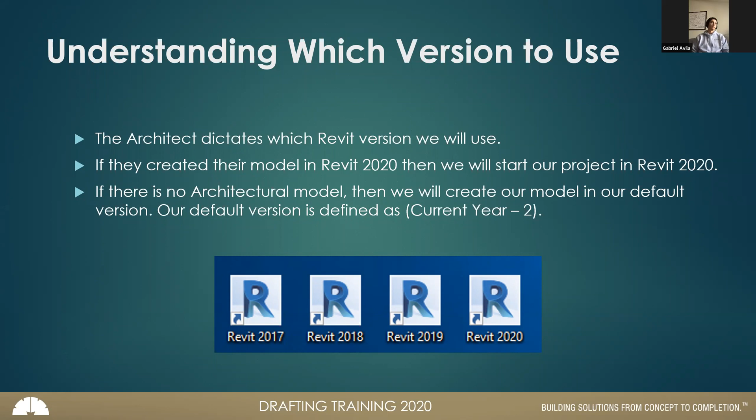All right, sounds good. Again, if you have any questions anytime, feel free to stop me or put it in the chat. I will be bouncing back and forth, so if I'm bouncing, you just ask the question.

Okay, so we talked about model version, Revit 2020, Revit 2019. How do you know which version the architect's model is in? To determine that, there's a pretty easy way. If you have Revit 2019 on your computer, you would open Revit 2019, you would go to open, and then under the model section there's this open, and then you just navigate to that location, and you click on the name, and you would see underneath it what version that was

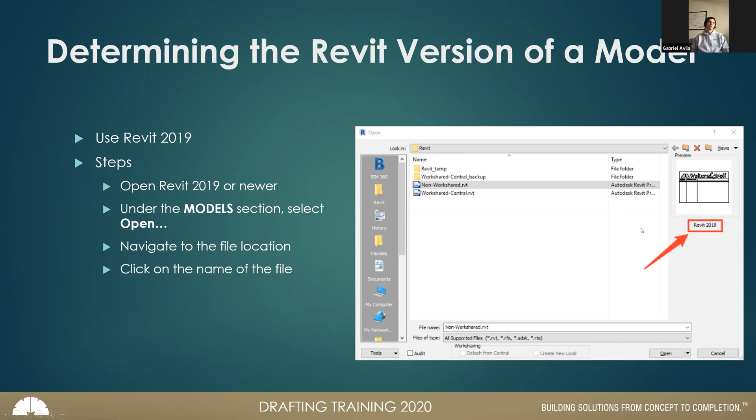created in. So again, this was something that Autodesk added in 2019 or 2020, all the newer ones. If you have 2018 or 2017, this feature will not be available, but it's a quick, easy feature to see what version you're using. Okay, so I'm going to go ahead and open 2019, and I'm going to determine what version that project I showed you earlier is in.

Oh, sorry if you're seeing my other picture. I'm going to show you how to do this. Sorry, I closed it a little while ago. Come on, there we go.

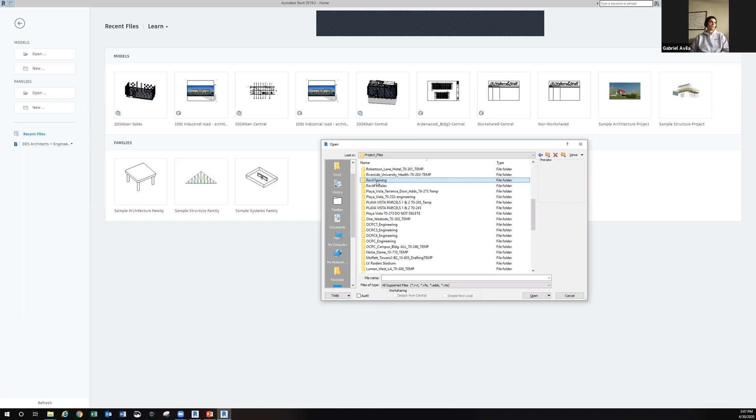All right, so I opened up Revit 2019. If you don't have 2019, you might ask IT to install it. But if you go to where it says models, you click open, and you navigate to the file that I mentioned. If you go to your computer, jobs, and then you go to temp folders, or any file that you got from the architect, you can use it. Go to Revit training, and then you go to advanced headquarters.

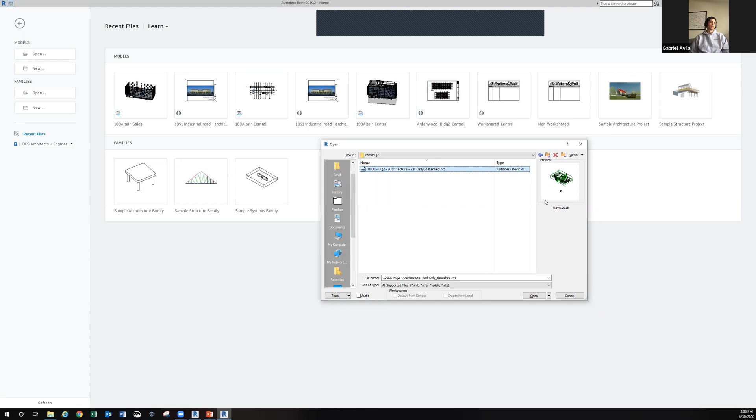This file here, once I click on it, you can see right here in this area, it says Revit 2018. So I want to make sure I'm using Revit 2018 when I start this project. So now I know which one to use. I'm in 2019. I don't want to use this one, so I'd close it and actually open up 2018 and start using that. So that's what I'm going to do. So that's a quick and easy way to figure out which model version you're going to use based on the architect's model. All right.

Okay, so now we know what version we're using. We want to make sure we're always using the Walters & Wolf standard project template. The standard project template is there. It has all of our hatch patterns, our lines, specific project parameters; everything that's built into this template is stuff we're going to be using for takeoffs, all of it. So it's always critical that you start with this template.

If you don't have or don't know the location of the project template, you can always save the location. If you go to our Revit application menu and you go to Options, you can click on File Locations and then you can add it. This location is stored on the server, in the WW standard template folder. Once you add it, you'll be able to see it when you open up Revit.

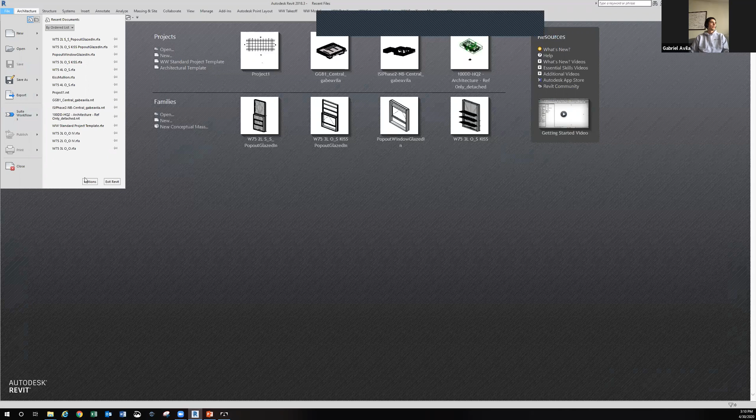So I'll show you here. You can see that mine says WW standard project template, and that's the one I want to use. So I'm going to walk you through how to add that to your startup screen, because you probably won't be seeing these. If you're in 2018, go to File, right here, there's Options. You click on Options. Then on the left side, you click on File Locations, and you hit the plus sign right here to add a template to the list.

Once you hit the plus sign, it's going to open up this dialog box, and you're going to navigate to the S drive. So I go to My Computer, S drive, Revit, and WW standard project template. And then it's going to be this one, the WW standard project template. Disregard the 02, 03, 04. Those are some backup files, but it's going to be this WW standard project template.

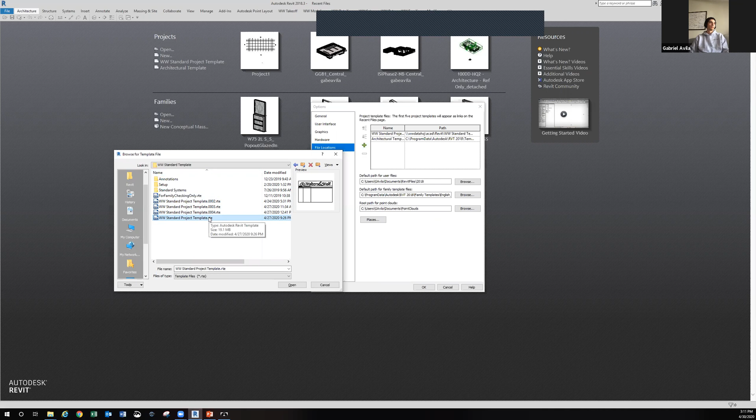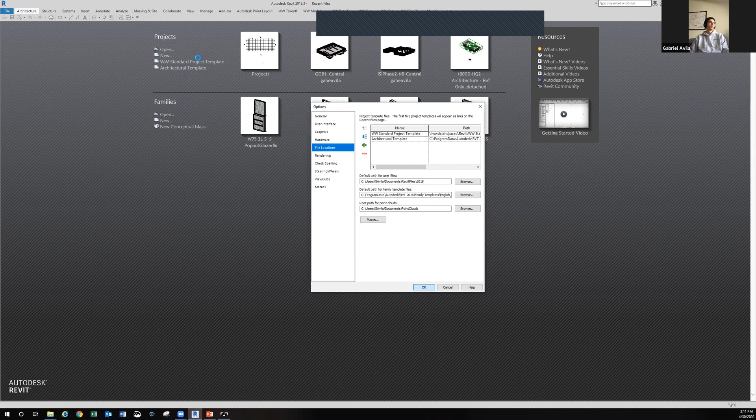Okay. And again, if you didn't follow these steps, I have a handout that I'll be posting online in the training section of the portal that outlines all of these steps. So you click on that, you hit Open. I already have it there, so mine's going to be the first one. And then you can move them up and down, and this will determine the order that you'll see here. Hit OK, and now you should see the WW standard project template on this list.

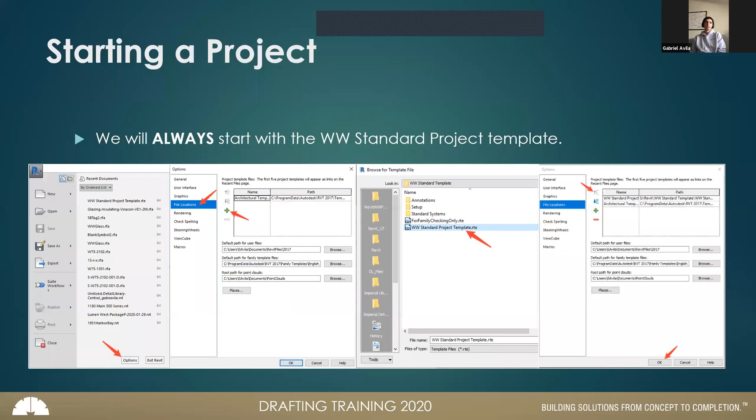All right. So that's one of the first things you want to do. Make sure that's on there so that you have it every time you start a project. The next thing I want to go over is a little bit of the interface. If you're new to Revit, it might be a little daunting to see all of the little features and buttons, so I just want to do a quick overview. The main ones have little asterisks by them, but I'll go through them all.

So the first one is the quick access toolbar. Once you open up Revit and start a project, you're going to see this quick access toolbar, with commonly used tools up here. Number two is the status bar, down here. This is kind of like the command line in AutoCAD; it'll tell you what to do next. The application menu, like we saw, is this big R, or sometimes it's File, depending on which Revit version you're using. That's kind of like Word, where it gives you the options of save, open, all that.

A big one is the ribbon. The ribbon is this area here. All of the buttons you're going to use are pretty much in this ribbon, and there are tabs on the ribbon to toggle between. So if I say go to the Manage tab on the ribbon, you would know to look up here and click on this Manage tab. The next one is the Options bar, down here below the ribbon, and it only appears whenever you run a command. Say you run a wall command, there are going to be options associated with that command, and they'll appear down below.

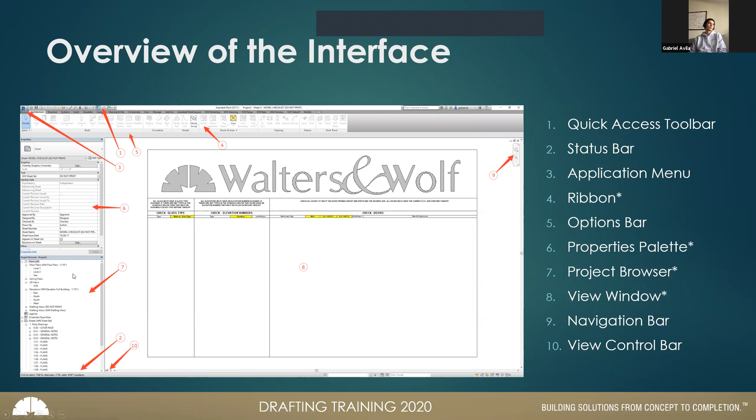Okay, so that's a basic overview. So if I mention, go to the properties palette or go to the project browser, you know what those are. Okay, now we're going to get into a little bit more of the specifics of understanding the internal origin point, project base point, and survey point. I kind of want to go over this because you kind of have to have some understanding of it before

the next steps. So the internal origin point is basically the 0, 0 point of the whole project, and it never moves. So this is a basis for the positioning of all elements. And again, this never moves. If you're using Revit 2020.2 or newer, you'll see this at that origin point. If you're using an older version like 2018, 2019, you won't be seeing that. You'll just be seeing some reference planes that I put in the project to indicate where the origin point is.

The next thing is the project base point. The project base point is this symbol here. It's like a circle with a little X. This defines the 0, 0, 0 of the project coordinate system. So initially, when you start a project, you'll see this project base point on top of the internal origin point. But this can be moved. This allows you to change the coordinates, your northing, easting, north, south, east, west, and the elevation based on where you put this.

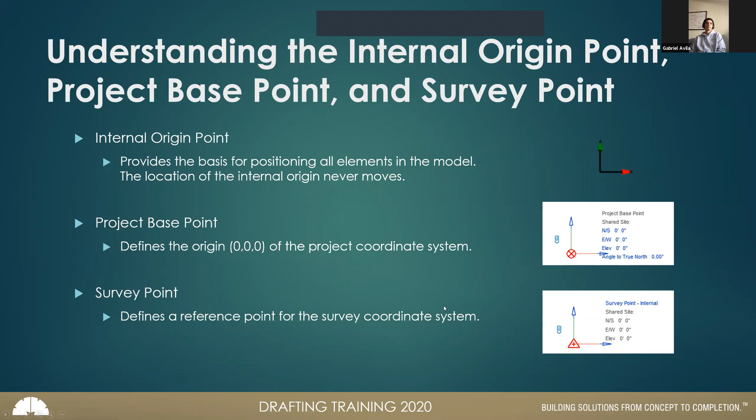So now you understand the project base points. We have our WW template. What we're going to do is actually link that architectural model into our project. So we're going to use the standard template, open it up, and then link it in. I'll go over this before I switch over to Revit. If we receive an architectural model, we typically link it in and use it as a guide. That's the main thing, it's just a guide. We're not copying from it or using it in any other way. Just using it as a guide for our reference.

And to do that, I'll show you the steps. Once you open up the project template, you would go to the site plan, and from the site plan, you would go to the ribbon, go to Insert, go to Link Revit, and then navigate to your folder. This is where I have the project. You would click on it, and then down here, you want to make sure it's set to origin. It is set by default, but we want to make sure, because if this is different, we're going to have some issues later on.

Okay, so I'm going to come out to Revit. I'm going to start with my WW standard template. If you see this upgrade feature, this is just because this template was in 2017, but now it's going to upgrade it to 2018 because that's the Revit version I'm working in. So it'll take a few seconds. It shouldn't take too long to open up. And again, once we move on to 2021, we'll be upgrading the standard template. And we will actually be linking it in.

All right. So for those of you that are following along, I'm going to take the link to the project from my desktop, just in case it's a little slow from the server, because it looks like it is a little slow right now.

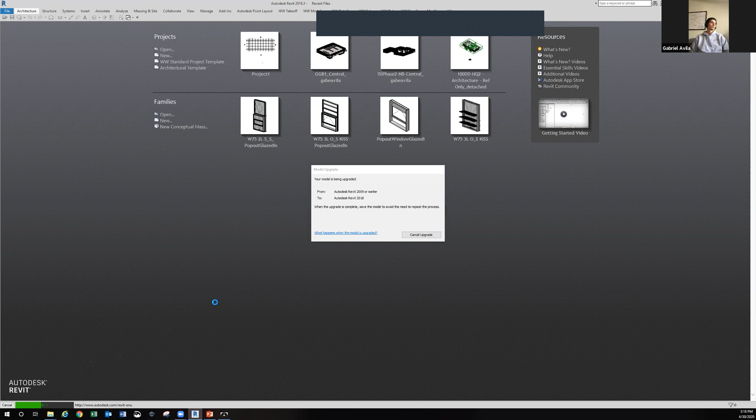And because I'm on Zoom, it's even slower.

All right, so now that this is my WW standard project template, this is our splash screen. What you'll see, I did move the project browser over here just to see more views. But let's walk through that process. So I'm gonna move this Zoom out of here.

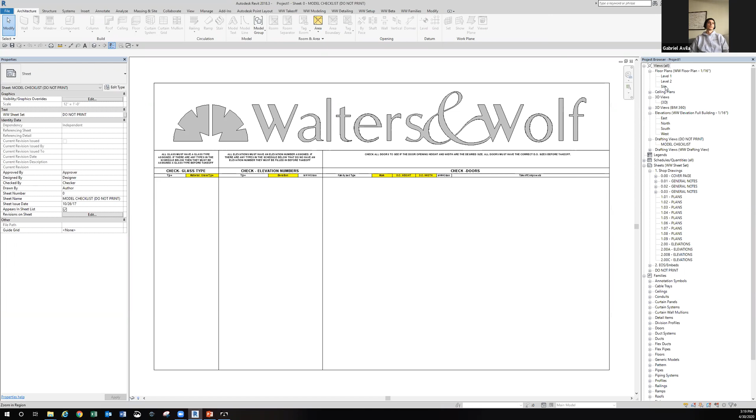So to link in an architectural model, like I said, you're gonna go to the site plan, which is gonna come in by default. You can see I have a little text here that's saying this is your project internal base point. So if I zoom in, you can see I have reference planes that indicate where it's at. And you can see that, if I zoom in, I have my project base point and my survey point at those locations. So they're on top of each other.

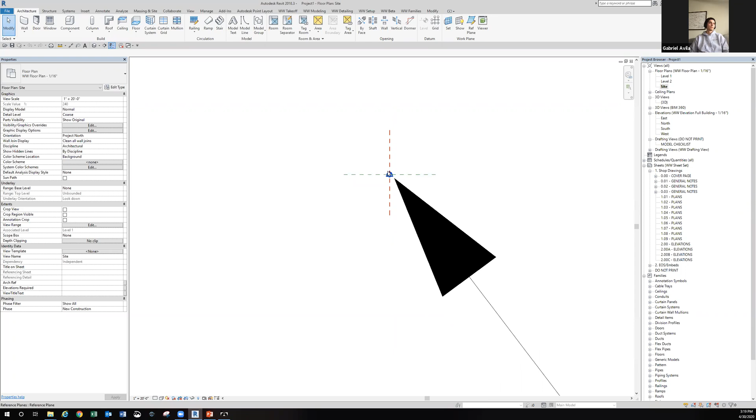If you zoom in or zoom out, they don't get any bigger or smaller. You might be able to play with the settings to make those a little bit bigger, but they don't get bigger if you zoom in and zoom out. Okay. So now what do I do? I'm in my site plan.

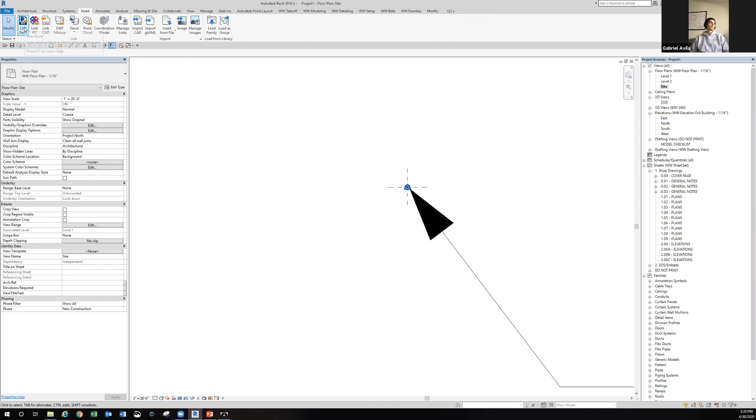I would go to the ribbon on the Insert tab, and I'm going to go to Link Revit. So if I click on Link Revit, I'm going to navigate. It's actually on my desktop to make it a little faster. So I'm going to click on my folder, I click on my file, make sure it's origin to origin, and then I'm just gonna hit open. So what that does, it's gonna link in the architectural model, and it's gonna be just one entity.

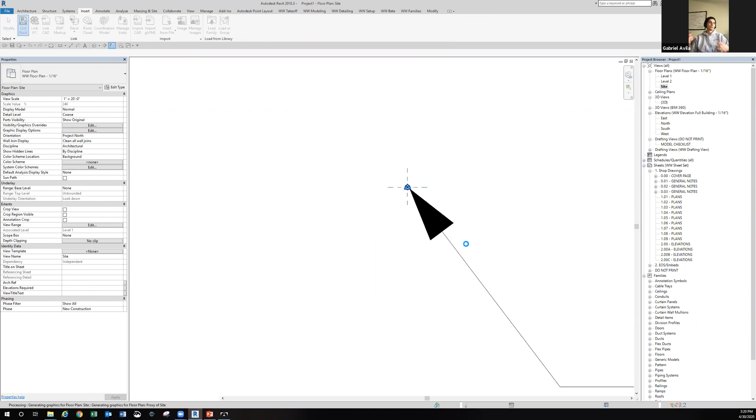If I zoom out, you can see that it got linked in. And if I hover over it, it's selecting it as a whole, right? You can see if I hover it, there's a little note that says RVT link, and it gives me the name of the file. So that's the first step. So I linked it in, and now it's in my project. All right. Everyone good so far? All right. Let's go back to our slides.

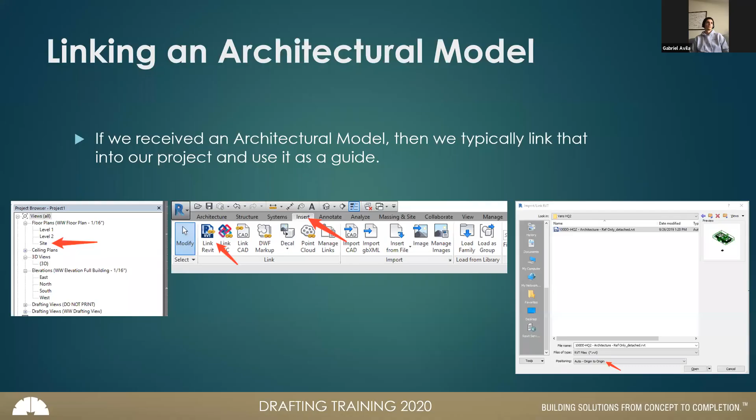So once I linked it in, the next thing I'm going to do is acquire coordinates. This is a big one. You want to acquire the coordinates. This is to make sure that it's in the right location. And you want to make sure you're selecting the architectural link. So I'm going to show you how to do that.

So once you have it linked in, if you go to the ribbon and you go to the Manage tab, there's this area for coordinates, and you're going to go to Acquire Coordinates. And once you acquire coordinates and you select the linked project, you'll notice the project base point and the survey point will update. This one didn't have any coordinates for a survey point, so it didn't update. But you can see that the project base point updated to correspond to the coordinates that were in the linked model. So let's go ahead and do that part.

So if I click on this, actually you don't have to click on that, sorry. You would go to the Manage tab on the ribbon. You would go to Coordinates, and you go to Acquire Coordinates. And you can see at the bottom on the command down here, select a linked project from which to acquire shared coordinates. I agree with Saul. It should be a little bit bigger so it's a little more obvious.

But you want to make sure you hover over an object in that linked model so you can see it has a border around it. That's how you know you're selecting the link. If you don't hover over it, you don't see the border, you're not selecting the actual link. So you won't actually acquire the coordinates. So you want to make sure it's highlighted.

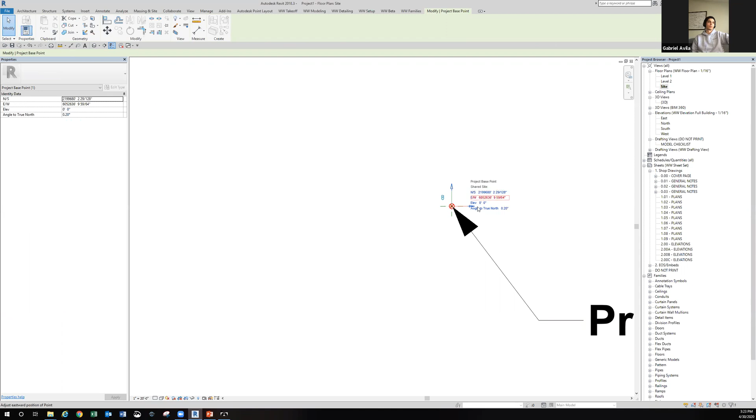So once I click on it, you can see it's doing something, it's generating, and now you can see what happened. This got updated. So if I zoom in here, now I just have my project base point in here. And if I select it, you can see that it acquired the coordinates within the linked project to my project. So now you can see the project base point actually moved.

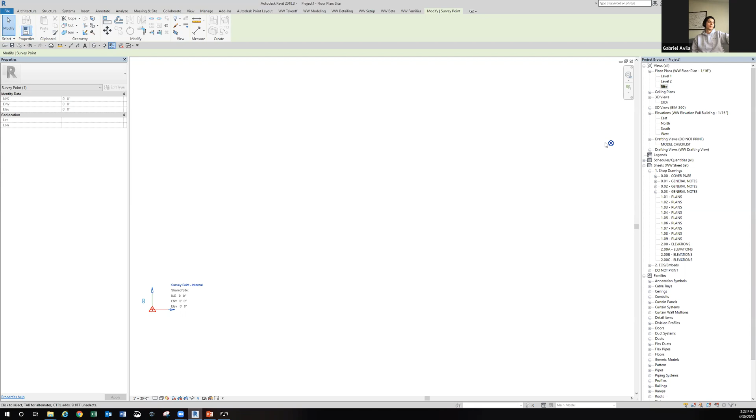And if I double middle mouse, so I use my middle mouse wheel, if I double middle mouse, you can see the survey point is way over here. That's because they defined this point over here to be 0, 0, and over here is actually where my project is. I have to zoom in here. So if you notice that your project goes away, it's probably because you're very, very far from specific elements within the project.

So you can see now I've acquired the coordinates. Does that make sense? Yep. All right, so if I acquire the coordinates, let's move on to the next step.

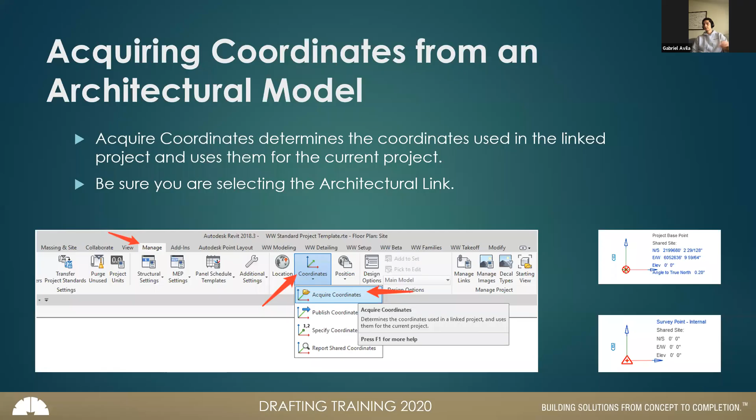The next thing you want to do is pin the architectural model, the linked model. Once you've acquired the coordinates, make sure you pin it. And you can also pin the project base point and survey point. That way they don't accidentally get moved. And once you pin them, it locks it in place. So if you eventually try to move it, you get this error like, oh, you can't move it because it's pinned.

So to pin it, once you click on something in the Modify tab, you'll see this little thumbtack. It's a little pin symbol. You can also use the shortcut, which is PN on your keyboard. Okay. So what I'm going to do is I'm going to click on it, hit this pin icon, and you'll notice that there's a little thumbtack on here now.

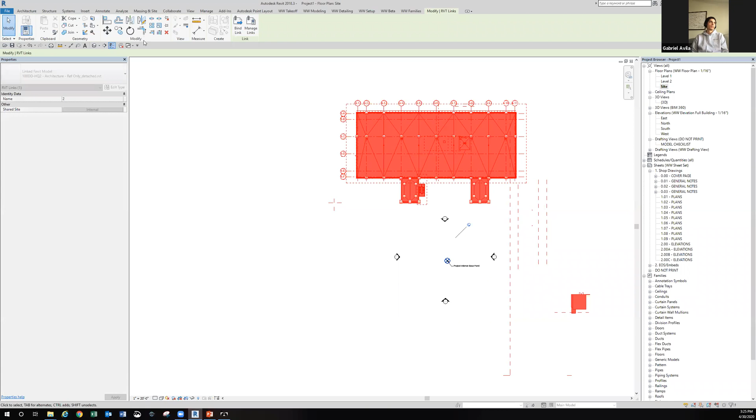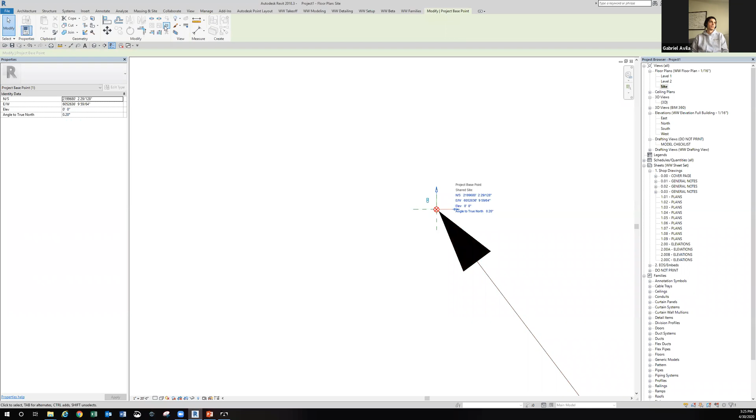So if I try to move this for whatever reason, it won't let me. If I try to use the move command, it's gonna give me this error: can't move pinned element. So it's always good to pin it. You can do the same thing with the project base point. So if I zoom in here and then I window select it, I can use that to pin. And then if I use my double middle mouse and then I pin it, now those are pinned.

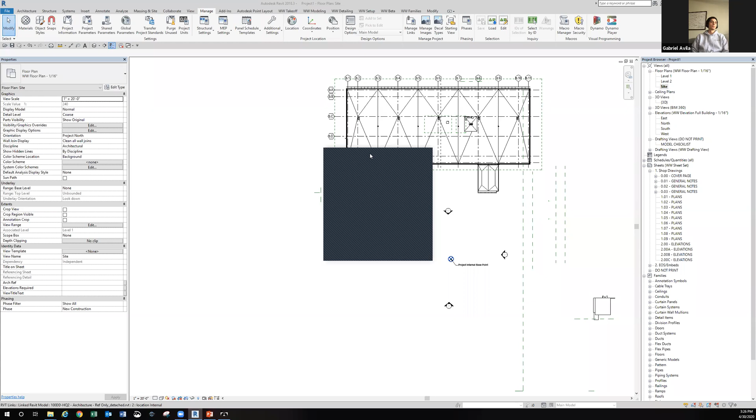All right, I see we have a comment in the chat. There's no site plan template for our standards, so we should make sure the project base point is turned on. Yes, so which I'll show you in a bit, we're gonna actually delete these levels, so we do have to recreate this. So it's a good point, Celine, which I'll talk about in a bit. All right, so now that we pinned everything, it's not gonna move. We can move on to the next step.

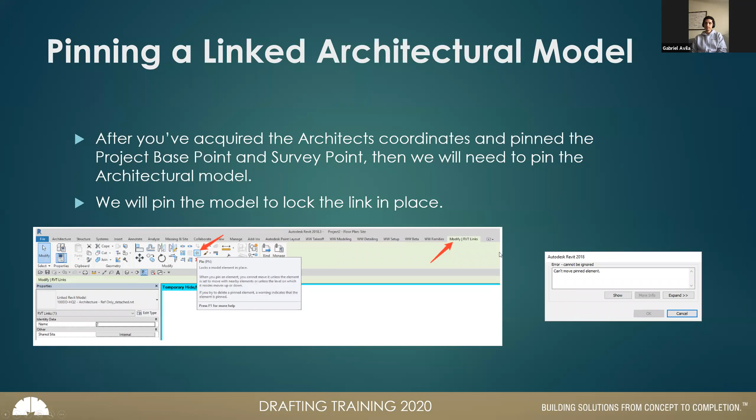So the next step is we need to adjust the overall elevation callouts. Once we pinned it, we need to copy monitor stuff. But before we do that, we need to make sure the elevation callouts are looking at the model properly. So in my example, you'll notice that the model's over here and my callouts are over here. So if I actually look at the north one, I'm not going to see anything. So I need to make sure that I adjust them.

And to do that, you would just window select the whole thing. So the arrow and the circle, just window select it all to make sure that you move all of it. And I'll show you how to do that. So again, you can see they're down here. So I need to zoom in to make it easier and just window select the whole thing. And you'll notice in your properties palette, it says it found two things. That's because the circle is an elevation and the head is the view.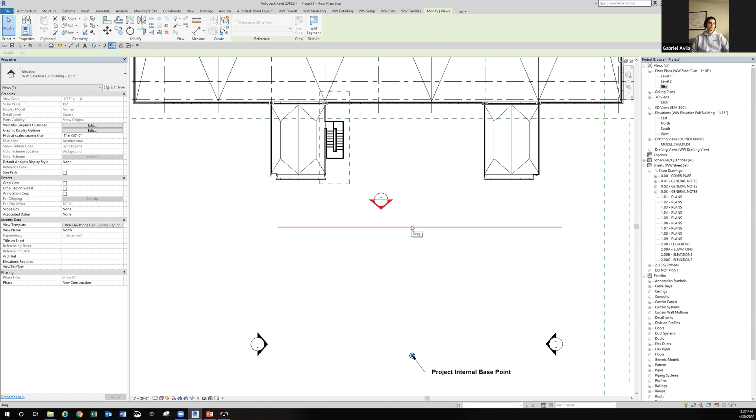So if you don't properly select it, you might end up moving just the circle. But if I click on the head, you can see the view is still down here, so you probably won't see anything still. So it's always good to just window select, make sure you have two, and then you can literally just drag it up and position it where you need to. So again, window select, make sure you go from right to left to get everything inside the box, and then just drag.

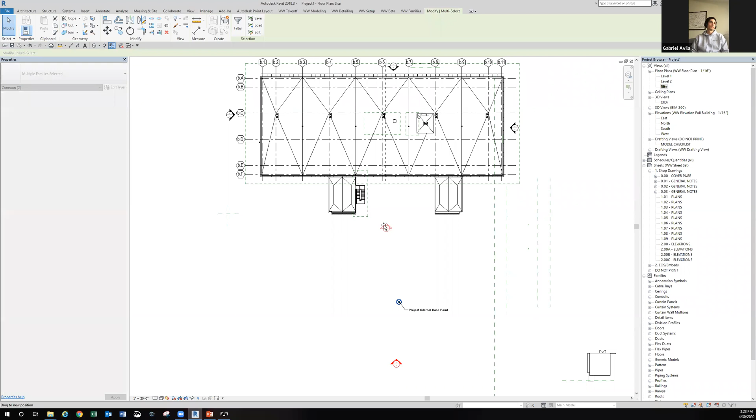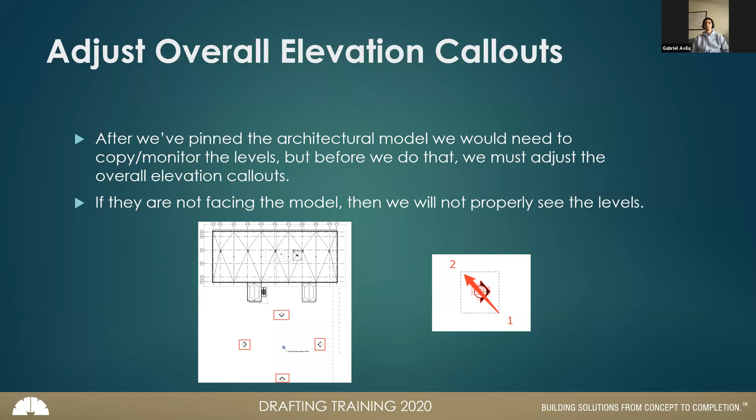And again, window select, and then move it. Position it where it should be. All right. There you go. Now your callouts are in the right spot. And we're going to move on to copy monitoring the levels. So we adjusted everything. We're going to copy monitor and pin levels. Everybody good so far?

Any problems or issues? I think everyone should be good.

All right. So I'm going to move on to copy monitor and pin levels. So copy monitoring, this feature allows you to copy certain things in from a linked model, and it actually monitors them to see if there's any changes. So say you got an updated architectural model, say they actually moved a grid or moved a level. If you use this feature, it'll let you know and tell you, hey, something's different. What do you want to do? It also gives you a guide to start with, so you don't have to recreate these levels from scratch.

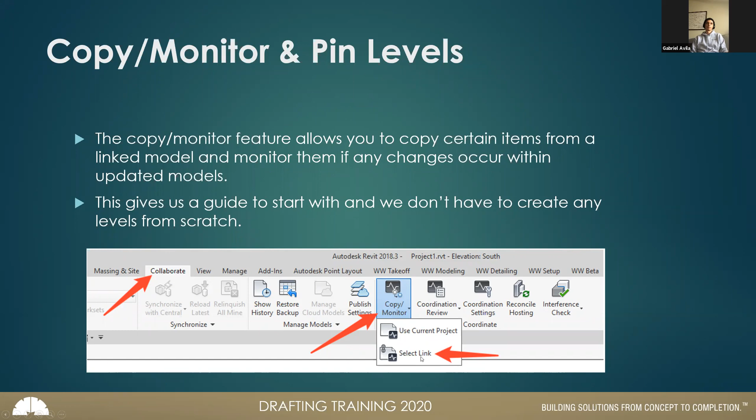So to do that, I'm going to go to this Collaborate tab. I'm going to go to Copy Monitor, and I'm going to select the link. All right, so let's go ahead and do that. So once I have this, I'm going to go to my Collaborate tab on the ribbon. I'm going to go to the Copy Monitor, and I'm going to go to Select Link. Again, you want to make sure you're hovering over an object in the link, because if not, you won't see the border. So once I click it, you can see this Copy Monitor panel appear.

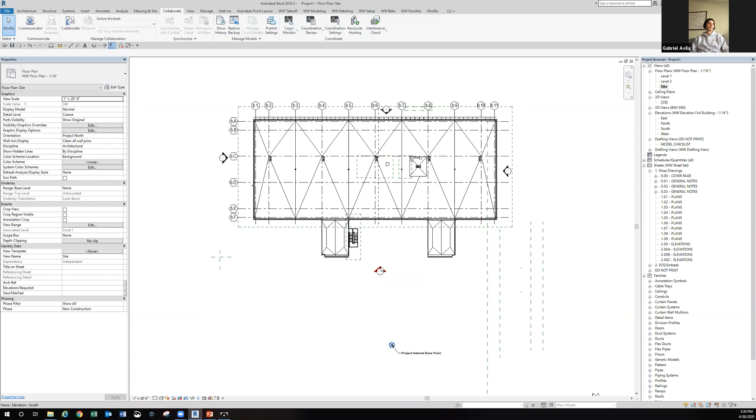Oops, I messed up. Disregard that. I should be in actual elevation view because I want to do the levels. So I like to go to the south view, so you can double click on the callout, or you can just double click on the south here. Either one will work. If I double click there, my view will open up. So now I want to copy monitor these levels. So I would go to Copy Monitor, Select Link, select this link here. Now this panel pops up.

So once it shows, I would go to the Copy button, and down below here, there's a Multiple. I want to make sure I check that, because that will allow me to window select more than one object. If I don't hit Multiple, it won't let me window select. I have to click one thing at a time. So I want to make sure I hit this check mark and I window select these. So I want to copy monitor all of these into my project. So you want to make sure you're selecting all the levels.

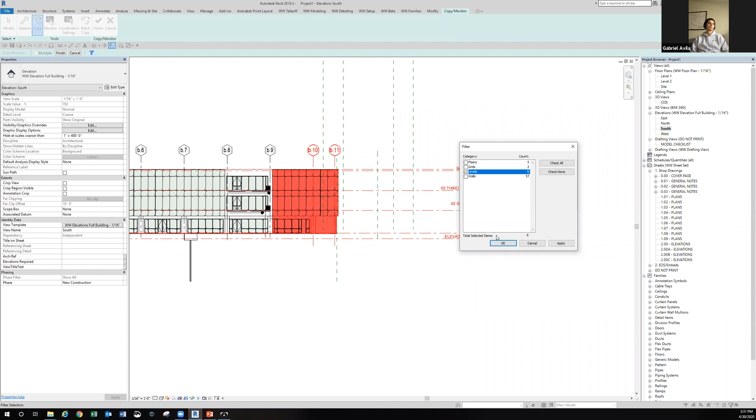So if you accidentally select a couple of things you don't want, there's this filter selection here, and it allows you to filter for certain things. I only want levels, so I would hit Check None, and I would choose Levels, and it would only select the levels. So once I have everything I want to copy monitor in, I would hit this Finish down here. It's a little confusing because there's two finishes. You want to make sure you hit this Finish right here first, because that finishes the multiple selection. So I hit this Finish,

and what you're going to see happen is once it finishes copy monitoring into your project, you'll see these little symbols here. These are the copy monitor symbol. So it's actually in your project, and it's monitoring to see if there's any changes. It also changes the ribbon to a Modify ribbon tab. We don't need to modify anything, so you just have to either click on this Copy Monitor tab or just click in space somewhere, and it takes you back to this Copy Monitor area.

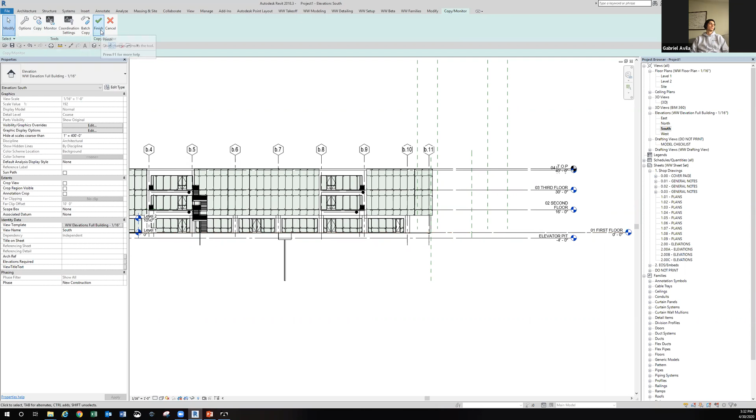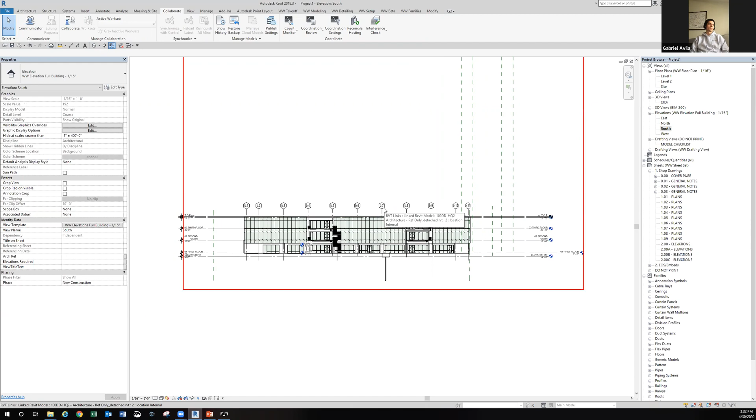And once you've done that, you can again copy monitor more stuff in, but I like to just finish this and just be done with the levels at this point. Okay. So now that I have my levels in there, I'll show you that they're actually in the project. So if you click on the RVT link and you type HH on your computer, that hides the architectural link, and you only see what's in your project.

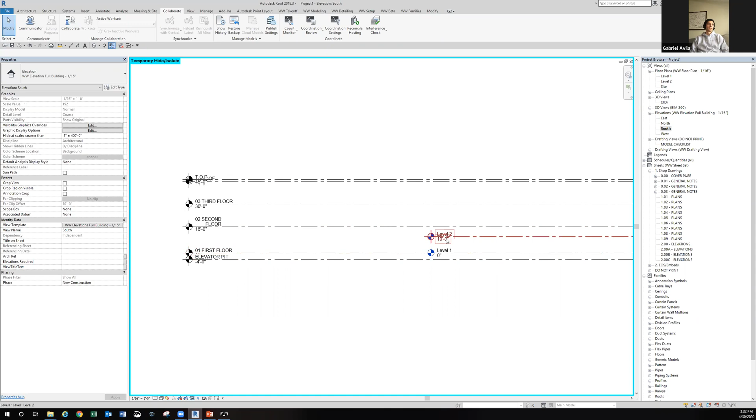So you can see that I have the levels that I copy monitored in from the architect, and I have some default levels here. So I'm going to go ahead and delete those in a bit, but I just want to make sure that you see what's actually in your project. Okay. And the last thing is I want to click on them and then pin them.

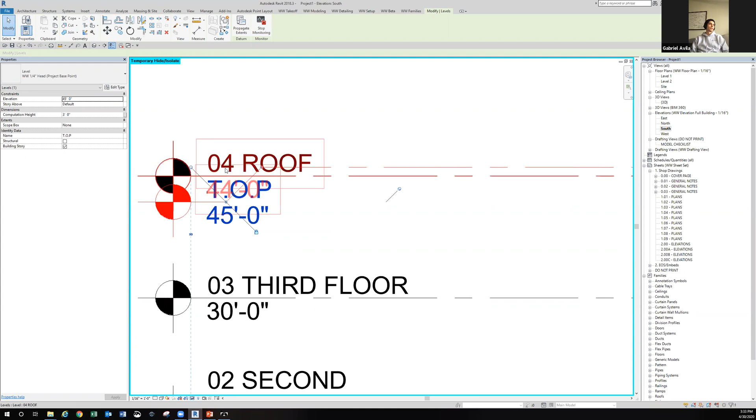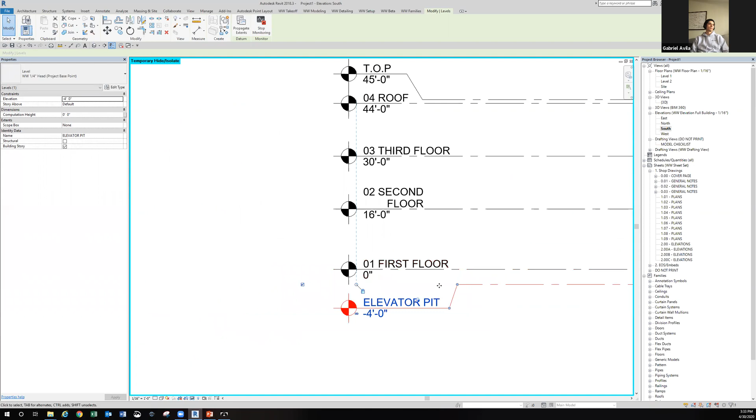You can also, if they're overlapping, adjust them. It's hard to see, but there's a little elbow here that allows you to add a little kink in it. And you can actually move it up and down and fine tune the way it looks. It's very hard to see, but it's a little elbow that allows you to move these up and down and make it look a little prettier.

Okay, so now I have my copy monitor levels in. I selected them, I pinned them, and they're in my project. So that's that.

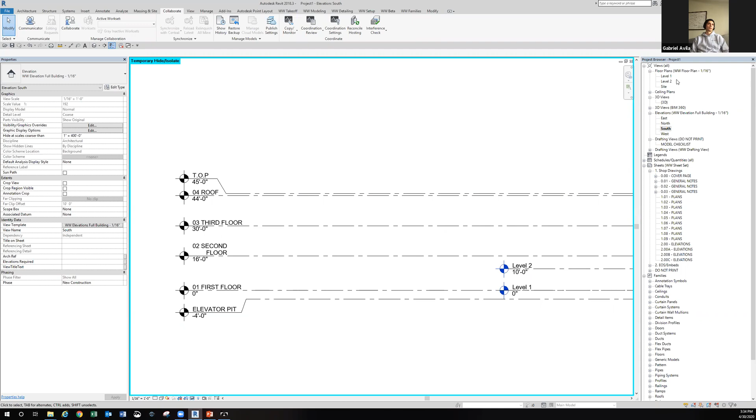All right, so now that I have these levels in my project, I want to make sure that I have a corresponding view, because if you notice, these ones that I copy monitored in are black, and the ones I have in my project are blue, like they're hyperlinked. So this tells me that there's a view associated with it. See, I have a level 1, level 2 that corresponds to these two. I want to make views for all of the ones I just copy monitored in. Not necessarily all of them, but I'll show you which ones you can do.

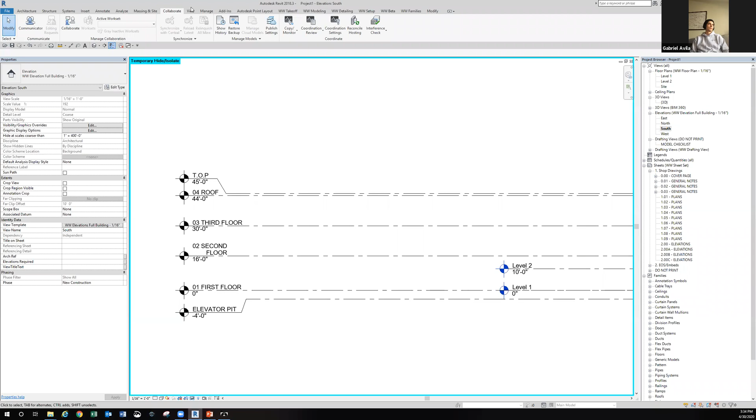So let's do that. If I go to my View, and I go to my Plan Views, and I go to my Floor Plan, you can create a couple different plans, but for this one, we're going to make a floor plan. And this is going to ask you what type of plan you want to make. So you can change which one you want based on scale. But I'm just going to keep it at 16th. And then this allows you to choose which ones you want to make based on the ones you have in your project.

So say I only want first floor, second floor, third floor, and the roof. I can hold control and select all of them. I can hold shift and select the last one. Say I don't want the elevator pit or the top of parapet for whatever reason. You don't have to select all of them, but you can select multiple. And then if there's duplicate ones, you can show those here, but I typically just make new ones from these. And then I just hit OK.

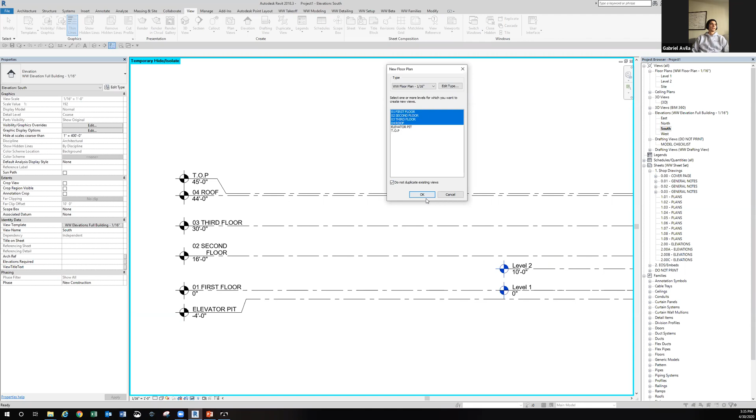And then you can see that it opened up the last view that you created. So I'm on the roof plan right now. So I've created first floor, second floor, third floor, and the roof using creating floor plans. So if I go back to my south, now you can see they're hyperlinked, right? These are blue, these are black. So now those have the correct views associated with them.

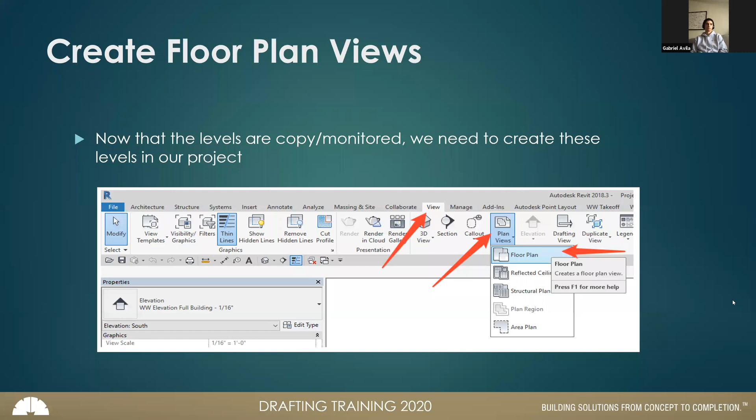The next thing I want to do is delete the existing levels. Now that I have these I want to use, I don't want to keep these in my project. I want to delete them because they didn't come in from the architects. If I actually start creating walls and I associate them to those levels, if I ever delete those levels in the future, all the walls that are hosted to those levels will be deleted as well, unless you change them beforehand. So it's always good, once you have levels in your project, to go ahead and delete them. And you'll see this window pop up once you delete them.

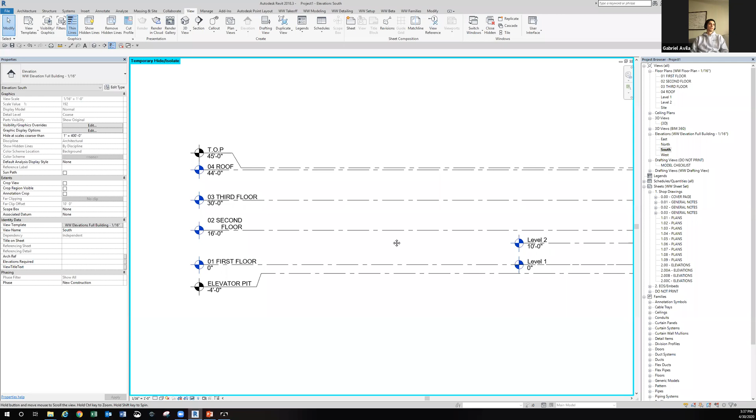Okay, so if I delete it from this view, it doesn't really delete it. It just deletes the view. It doesn't actually delete the level. So you want to make sure you actually select the levels, level 1, level 2, and you hit the delete button. This is going to give you the prompt that I mentioned earlier. It's going to ask, are you sure you want to delete it?

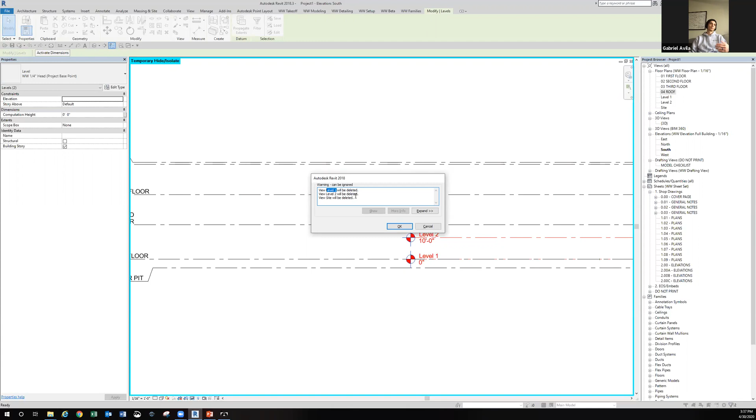And because the site plan, like Salim mentioned, is hosted to level 1 that we're deleting, it's going to also be deleted. So in the future, if we ever need to make another site plan, we'd have to recreate it and make sure the project base point and survey point are turned on. So if I hit OK, you can see they're gone from the view and they're gone from the project browser. Okay. So that's a big point, to make sure you delete those. We don't want to keep those in the project.

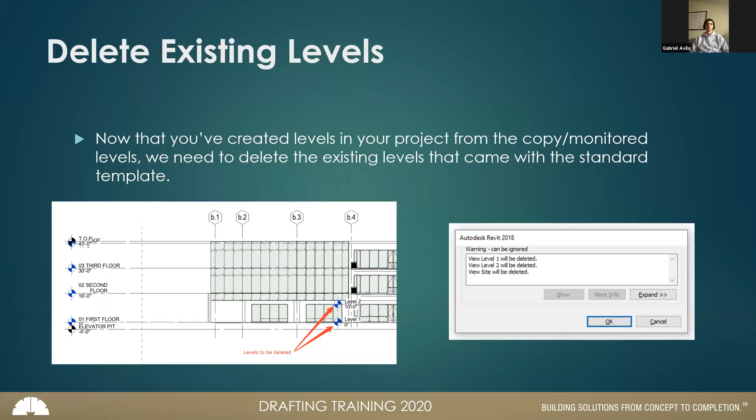Okay. Next thing we're going to do is we're going to copy monitor the grids. So similar to copy monitoring the levels, we are going to do it for the grids. And again, it's a way for us to not have to create them ourselves. HR to bring it back. So HR is a shortcut to bring anything back that you've recently hidden.

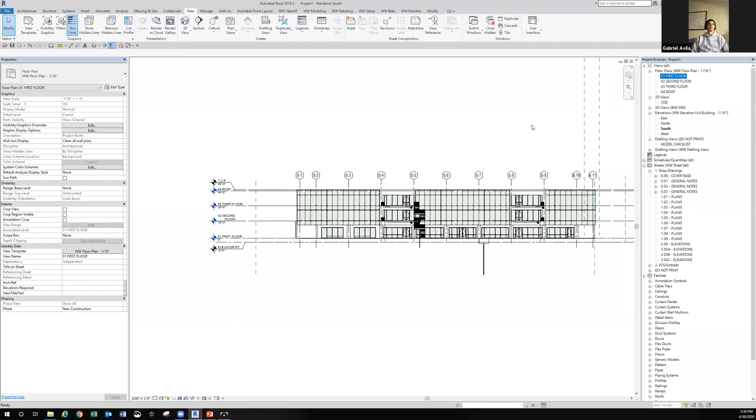So what I want to do now is I want to go to my floor plan, my first floor, and I need to copy monitor the grids. So it's the same process. If I go to my ribbon, Collaborate, Copy/Monitor, Select Link, and I'm going to click on the link. And then again, I'm going to hit Copy Multiple. I'm going to do a window select.

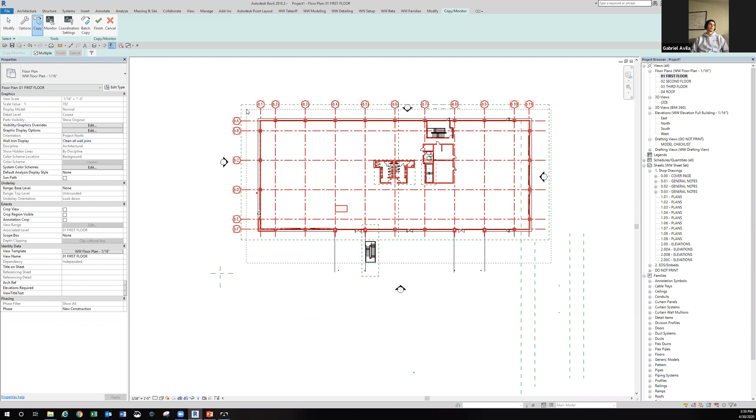And again, I'm just window selecting everything right now because I can filter it out by using this little funnel filter. I'm going to hit Check None, and I'm just going to click Grids. It'll deselect everything, and it'll just select the 17 grid lines that I want. Once I've finished selecting all the grid lines, I hit Finish. Remember to click the bottom Finish.

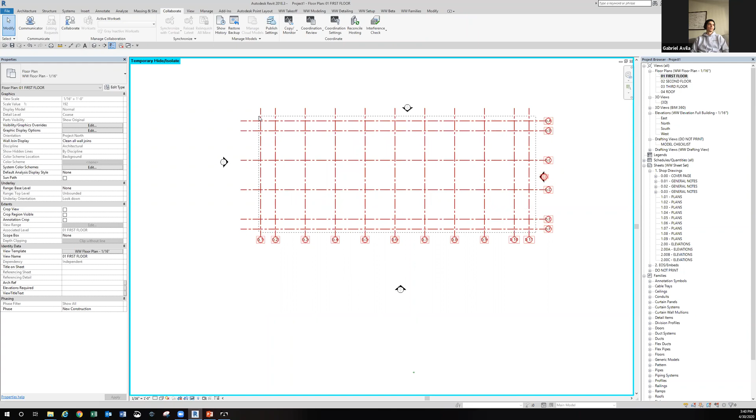You can see they all have the little monitor symbol on them. And I would just click in space to go back to the copy monitor feature. And then I would just hit Finish. So now I have them copy monitored into my project. So if I click on something like the stairs, hit HH to hide it, now you can see I have my grids in here. So this gives me a starting point.

You know, I don't have to actually lay these grids out, but I can copy monitor them and then pin them to make sure they don't actually get moved. Because I don't want to actually click on it and move it, because then it would be different from the architect's. You'll also notice that these bubbles only appear on one side.

So for whatever reason, if you want them on both sides, or say one actually turned on this side and not on this side, you can click on the grid and then click on this checkbox. But say you want them on all sides, you would click on one, hit Edit Type, and then just turn on this default end so that they're on both ends. So now they're on all sides.

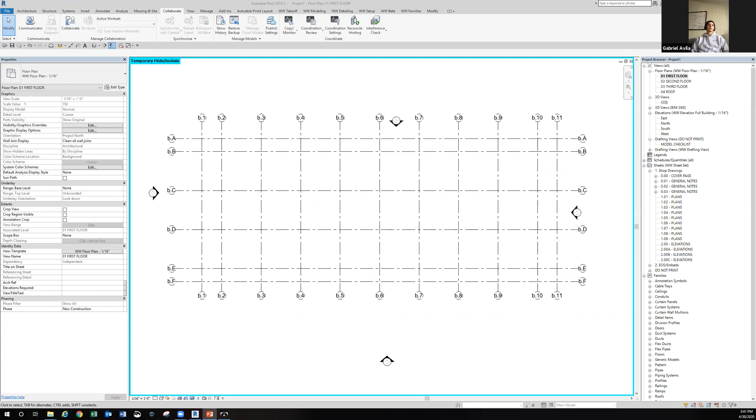The reason we do this is to set it up because this will appear in all the title blocks on every sheet and in the cover page. And then it also will help for downstream tools the drafting team uses, like GG 2.0, which does all the glass, and the Gen Notes feature. This will allow us to make sure that the job name and job number are in there, so that way they don't actually miss that downstream.

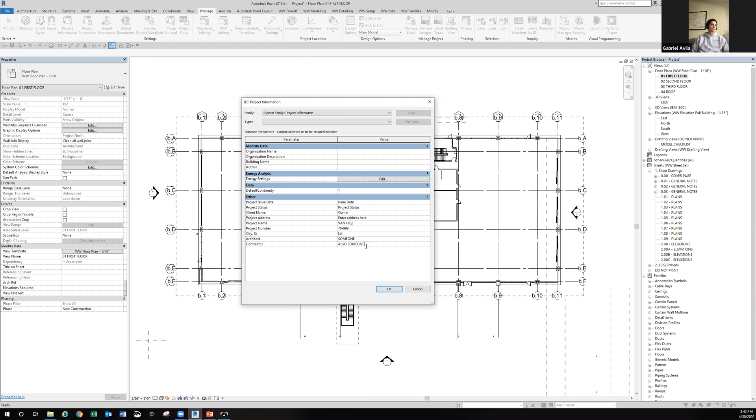So to do that, if I go to the Manage tab, I go to the project information, and in the project information, you can enter the name here. So I would enter VAN HQ2, project number, put in the project number 70, I'm not sure what it is, -999. Just go to LA, and then architect is someone, the contractor is also someone. And then you just hit OK.

And now you put in all of the project information. So if you go to a cover sheet, you can see that it's automatically filled in for you. And then if you go to an actual sheet, you can see it's filled in the title block. So we want to make sure we do that so that it's set up for the drafting team.

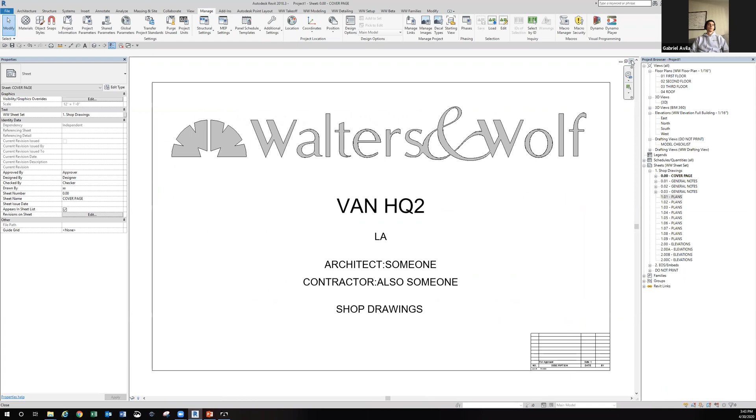Okay, so that's pretty much it setup wise. Again, this is only from when you get the model to right before you start modeling. You want to make sure all of those steps get done to ensure that you're in the proper location, you have the proper grid lines and everything's pinned. And then you would move on to modeling, whether it's the sales models or operations models, it doesn't matter. Whichever way you're modeling, you want to do these steps beforehand.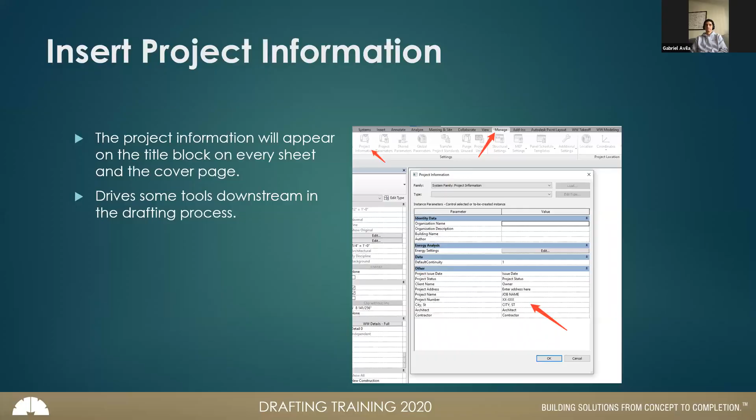Okay. I think that's it. Any questions? I know I went fast. Again, I will post, I made a handout, which I'll show you guys. Where is it?

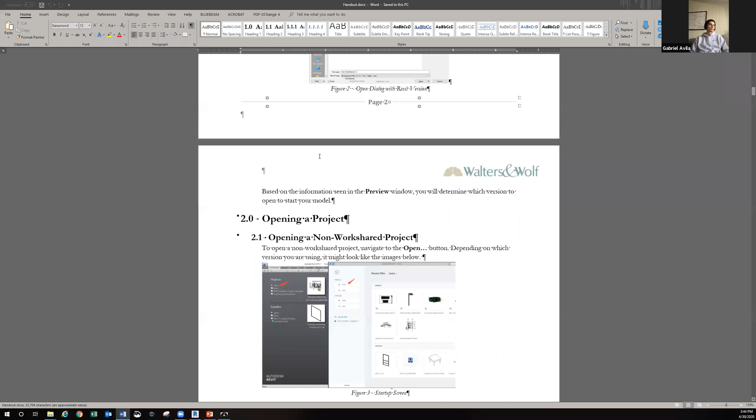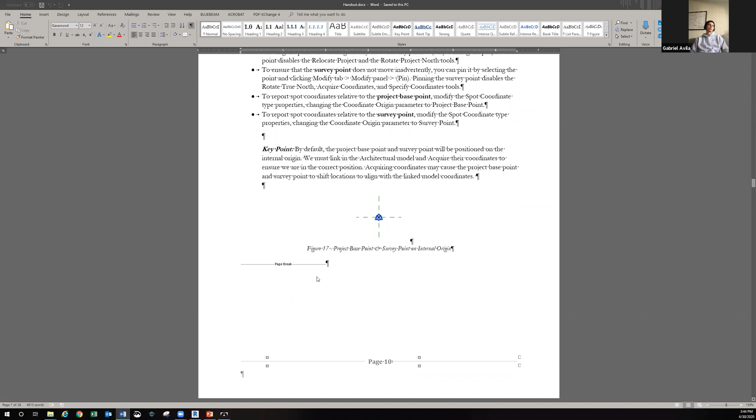So I do have a handout that actually walks you step by step through all the things we just talked about. So everything that I went over, it's a little more in depth, more in detail. So I'll be posting this on the training page for you to read over as well. It's 28 pages, so if you need to reference this, you can. Again, I will be posting the video recording. So are there any questions on anything you guys saw?

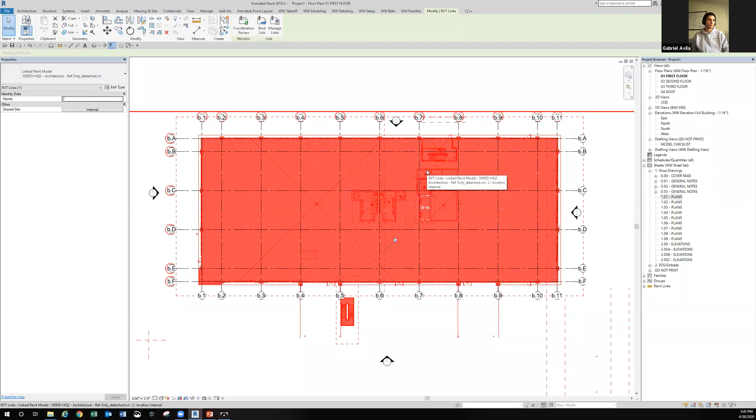Just real quick, when you copy monitor the grids and the levels, you're copying those from the model you get, and then you're deleting the grids from the template. Is that right? You won't necessarily delete them. So as you saw, if I hide the architectural model, I have my grids in here. But if I isolate just the architect's model, their grids are still on. So they're still there. They're just in their model.

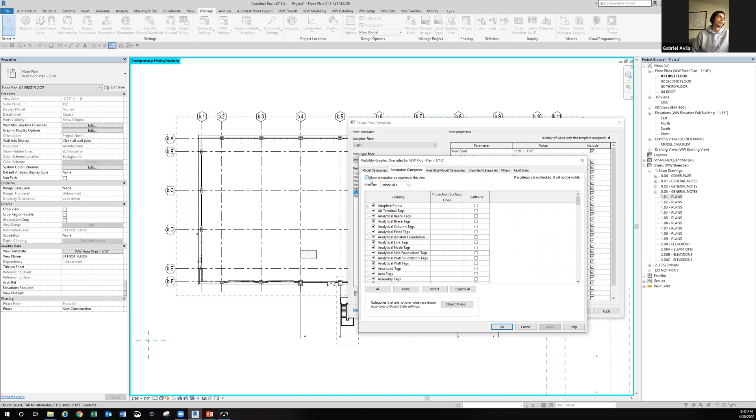Yeah. Typically what we do is once we copy monitor them in, we'll turn those off. So in our view template, which is a little more advanced, we have the ability to control what we're seeing in the architect's model. So say I don't want to see any of their grid lines or annotations or anything, I can turn them off. And you can see they all go away.

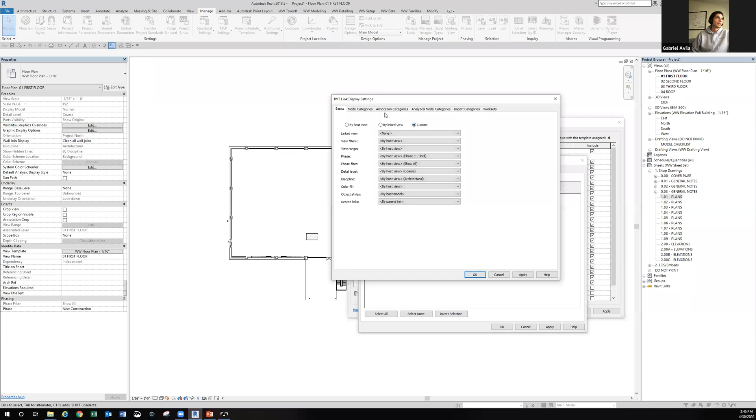They're still in the linked model, but you can see that I turned them off. Oops, I did the wrong one, sorry. This is our model. I want to go to the linked one. I can say I want it to be custom, and I want this to be custom. I don't want to see any of their annotations. And I hit OK. And now you can see I just have our grids that we copy monitored in.

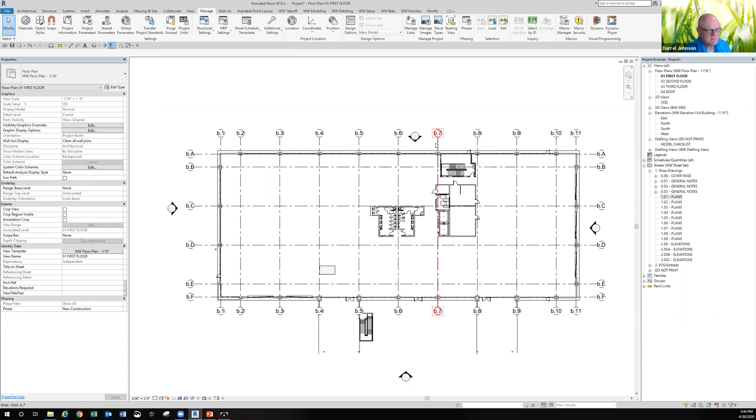Okay. So you're not deleting anything, you're just turning them off. Yeah, exactly. I'm just turning them off so they're not printed or shown in the shop drawings, but they're there in the background kind of.

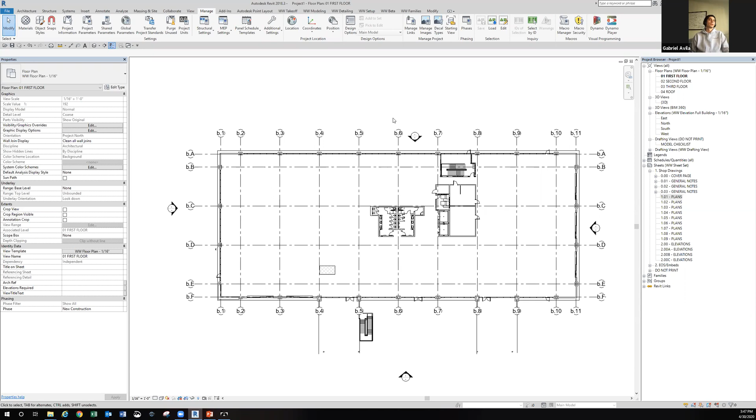Any other questions in particular? Again, I want to show you, there's nothing in the actual 3D besides the linked model. You can see if I hide it, there's nothing in here. So again, I just want to make sure we do all the steps beforehand before you actually start modeling.

And Damien's going to show you next week the basics of SOS models, how to do that. So once you've done this part, you'd go to his section of SOS models, and then eventually down to operations to convert it or actually just model based off the architectural or the SOS model.

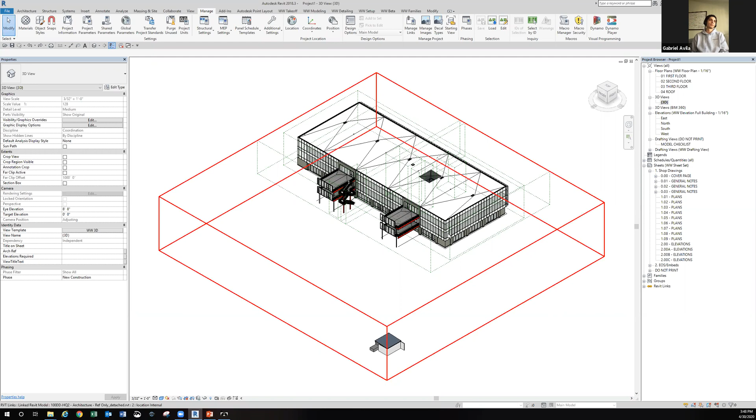All right, any other questions? Any other comments?

There's the baby, she's ready to wake up.

Where were those notes at? I'll be posting them in the portal. I'll be sending it to the training team, and then they'll probably put a link on there to the file. Thank you.